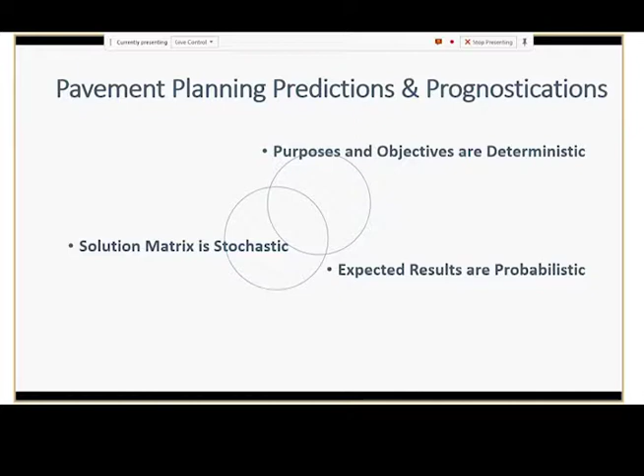In analyzing the performance characteristics, the expected life, and other performance variables, there are tools that are more reliable than others. The chosen tool we are using right now in MnDOT, particularly in developing the Pavement Investment Manual, because this presentation is a microcosm of that large effort, is reliability analysis, where you have a coalescence of these three contrarieties: the deterministic, the stochastic, and the probabilistic.

Now, in a reliability approach, you can look at the hazard of a particular fix versus time, and then think of the reliability as a mirror image of that. There is a hazard function, and there is a reliability function. Those are the kind of things we are using, such that if you analyzed our data in Australia, you should still get about the same result using the same method. So we are restricting the method in order to encompass the deterministic, the probabilistic, and the stochastic.

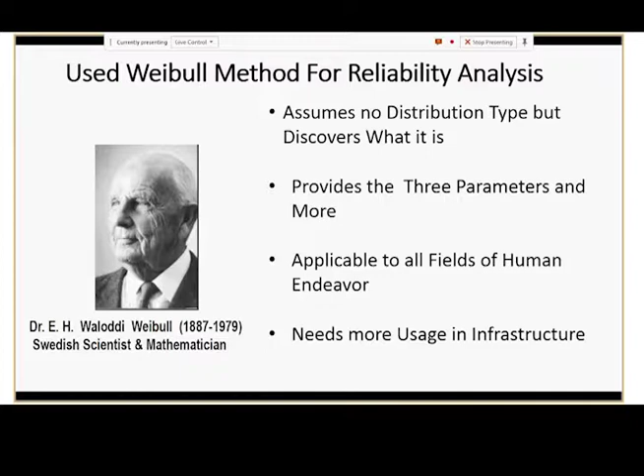But the Weibull method is applicable in the sense that it doesn't assume a distribution. In some cases, you will say it's normally distributed and use a certain analysis. But the Weibull method doesn't make an assumption of your distribution. It solves the problem and ultimately tells you what distribution it belongs to, and later I will show the various possible distributions. The Weibull gives us the scale parameter, the location parameter, and the shape parameter. The location parameter is the point at which you begin to see distresses, called the threshold time to failure.

Now, the shape parameter is a very vital part of what we do because it tells us what kind of failure mode you have. Do you have the infantile failure mode? Do you have the uniform mode of failure, which is the random mode of failure? In reliability analysis, the random mode of failure is the uniform rate of failure. Or do you have the end of life? When we design, we hope that most of our systems will have an end of life type failure.

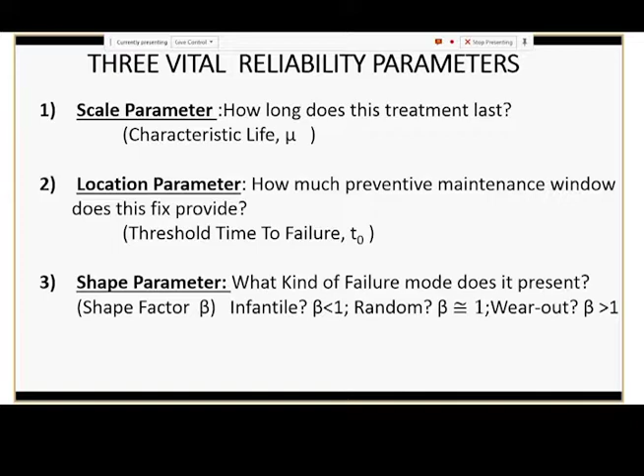So the Weibull analysis solves the problem and gives us these indices. And that's where it's very powerful. I've already defined it, but I just wanted to mention one simple thing about the Weibull distribution: it uses the cumulative distribution function. It doesn't use the probability density function.

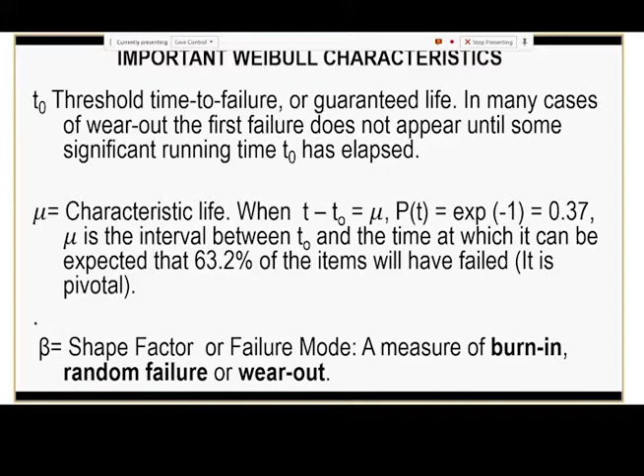In which case, the 63.2 percentile value is indicative of characteristic life, and the arithmetic is right there. I don't need to go into that. And the shape factor, like I said, is also what tells you whether you have burn-in, which is early failure. Some electronic systems are known to fail early, and then the rate of failure decreases with time because the systems fail early. Then you have the burn-in, and at the other end of it, you have the wear-out failure, which is the end of life failure.

Now, if you look at the area under that increase, somebody asked a valid question yesterday. How do we use this life extension or these life values to actually quantify benefits? So I said, well, that's a very valid question. Because most of the time, don't we talk about the area under the curve? Yes, we talk about the area under the curve as the benefit. But until you monetize that benefit, until you bring it to dollar value, or normalize it according to dollars, it doesn't really compare well with another fix.

So the idea of concrete rehab is to do that thing, to introduce that benefit area. And when it introduces that benefit area, then we want to step back and ask ourselves, at what cost are we introducing a particular benefit? And that's where the rubber hits the road.

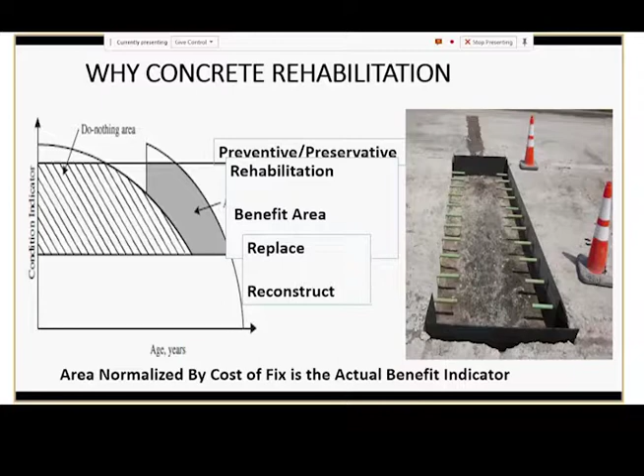And again, the various tools with which we get things done, that reminds me of a story. I don't know if I have time to tell any stories now, but there was somebody who had the regular chant of all in a day's work, a day's wage for a day's work, and he went from door to door. Anything for me to do for you? So he came to this lady's house, and the lady said, well, take a bucket of paint and this brush, go outside and paint the porch. So this gentleman came back after some hours and said, oh lady, I enjoyed doing the painting. So the lady says, all done? He said, yes, it's all done. By the way, lady, what you have out there is not a Porsche. It's a Mercedes, and I painted every inch of it.

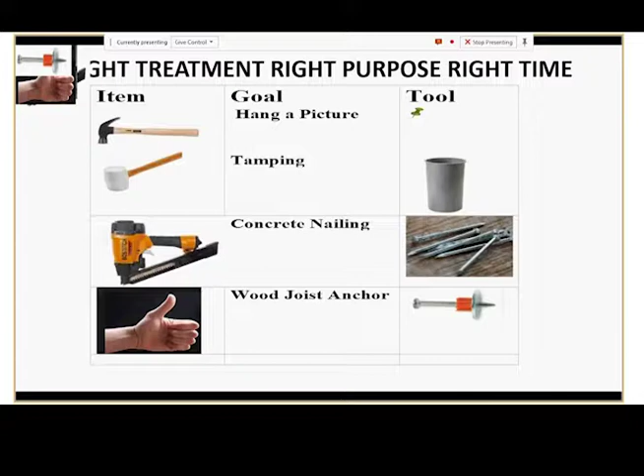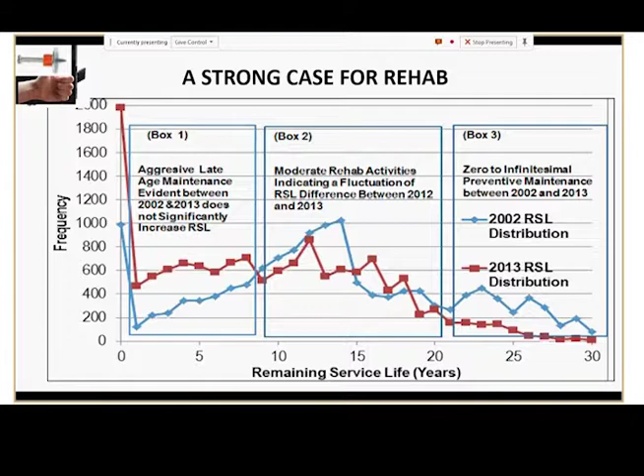So that zone is the sensitive zone where you have that crisscrossing, where a little investment, rightly done, not painting a Mercedes-Benz, can change the overall landscape of the remaining service life. And that's the reason why we do concrete rehab.

Dr. Debaroti Ghosh is not here.

While working on this pavement investment manual, we saw the need to create a software, and we did create a software that generated performance curves for about 535,000 rows of data representing the network performance, RQI, SR. SR is surface rating in any case. It's a combination of cracking, rutting, and everything. But for concrete, of course, it's faulting and cracking.

And then the ride quality index, that's a quasi definition. It's really not an index as such. It's still a rating, but it's how the riders felt when they rode on a scale of 0 to 5, 5 being the best. So what we did, we went into the network and wrote this program that generated performance curves so that we can see from the D records. We also have it for the M records. By the way, the D records are the design records where all the performances, all the fixes and everything are arranged according to design. For instance, you have unbonded overlay.

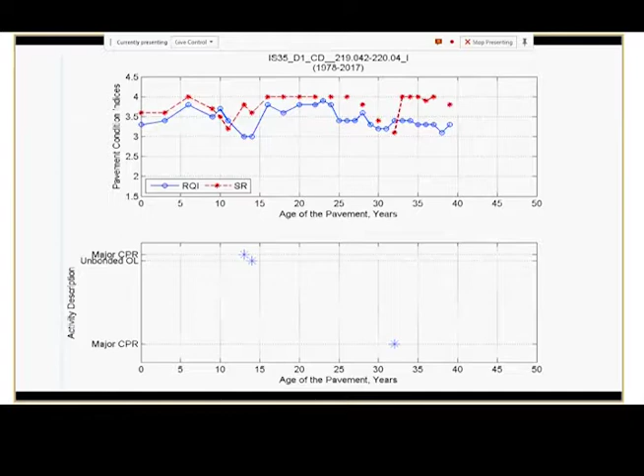Or, for instance, a thin overlay. You would see that in the network as a design. Then we also have the M records. So from the M record, you can call any section based on its M record or on its D record. And the M records are the mile records. Okay. So we now looked at the M records and decided that we will automatically generate the performance curves. So we generated, I believe it was about 15,000 performance curves based on the M records. For the D records, I believe it's slightly less. So we have 15,000 performance curves.

What do we do? How do we crunch through them? The things that are important to us are the age at which the fix is done. We call that time to rehab, TTR. Then the spike on account of the rehab. Okay, there's a spike for SR, there's a spike for RQI. And then what about the CAR, which is the condition at rehab? So we're interested in that. And also, we want the remaining service life. Now, our definition of remaining service life is the number of years it will take for the performance to reach 2.5 RQI.

So back to the Weibull method, your normal distribution assumes a normal distribution. Your Weibull distribution does not, but it allows you to do your calculation and later tells you your data is normally distributed, it's log normally distributed, it follows an exponential function and so on. So what we do with the Weibull distribution is that we get a particular fix and its performance over time. And then we do either a ranking or a CDF, a cumulative distribution function. So we run it through this equation that looks very complex, but it's not complex. What you do is take log twice, and then you linearize it. And once you linearize it, the parameters are right there from the lines that come out.

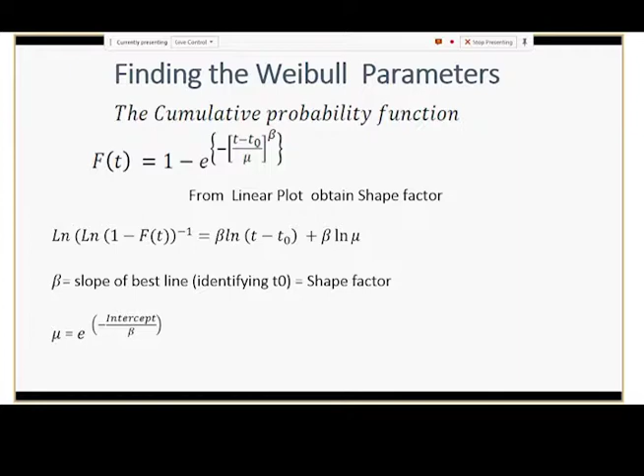And then you are able to get your beta, which is your gradient of the new straight line that you have generated, and your beta is your shape function. And then your mu is the scale function, which is the expected service life. And then later there are tools for getting the location parameter. And so having established both the reason data for concrete rehab, as well as the various nitty-gritties of the Weibull method, I'm going to run through the remaining slides.

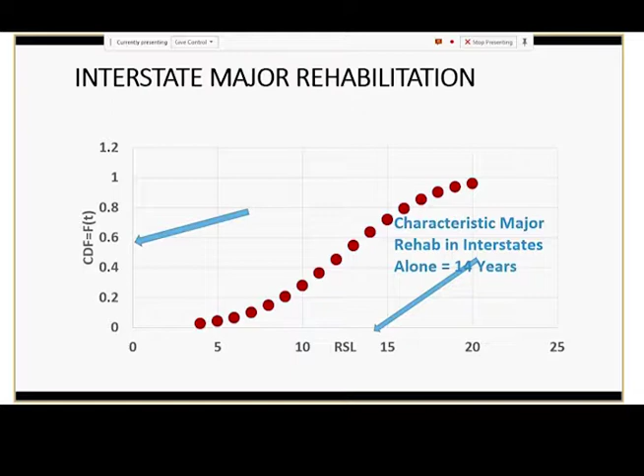So I did look at the interstates. The interstates are subject to very heavy traffic at tremendously high speeds. And what I found out, for major rehab without grinding, I found a characteristic life of 14 years. What I also observed was that there was no window for preventive maintenance, which is the location parameter. In other words, the T0 was 0. So there was no window for preventive maintenance. As we go along, we will see others.

Now, for major CPR with grind in the overall network, what I found was that the characteristic life was 18 years. And the failure mode was 2.9. That's the beta factor. Now, this is the interpretation of beta. If it's less than 1, it means that you have an infantile failure. If it's about 1, then you have a random failure, which is the uniform rate of failure.

The farther it is away from 1, then the more end of life it belongs to. Now, if it's between 1 and 2, then that looks like a log normal distribution, and that's usually governed by things like cracking that are not necessarily failure related, but they introduce some other form of distress modes. And the location parameter there was about 2 years.

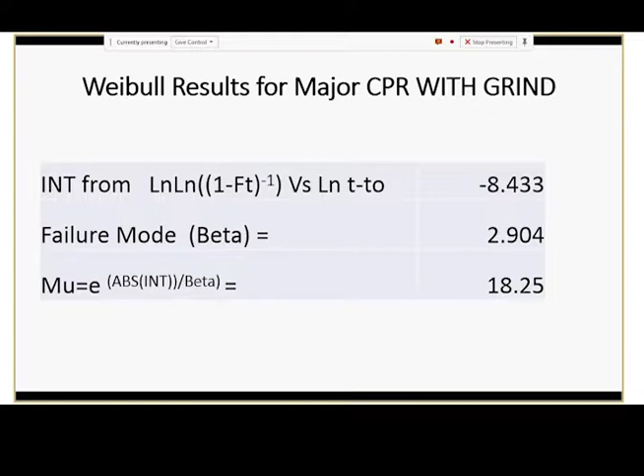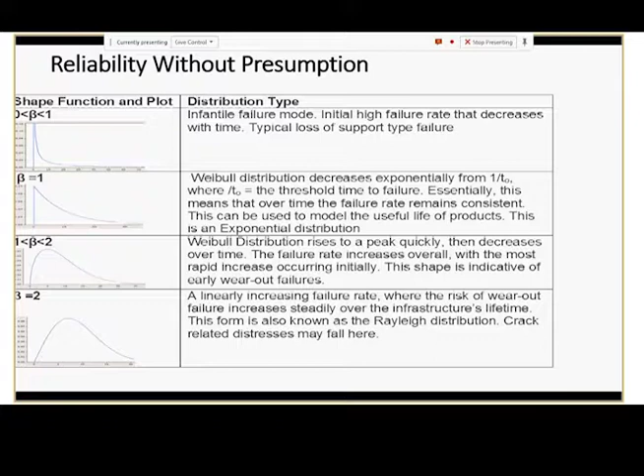But think about it. If you have 2 years as your preventive maintenance window, how much mobilization can you really do within 2 years? So it leaves you technically with not much of a window. So here, I don't need to go through all this. These actually show us the various shape functions that show the kind of distribution that you have. And they are very important when we go into the real technicalities of evaluating the performance of our systems.

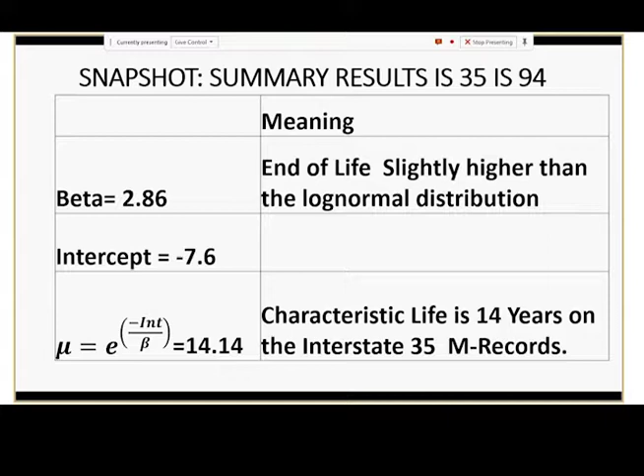Okay. Another thing I looked at was the interstate. I did talk about the interstate already. All right, so let's go for that. Here is the hazard function. The real definition of hazard function is the probability density function divided by the reliability, which is 1 minus F(x). Okay, so this is the hazard function. Sorry, which is 1 minus F(x), our F(x) is the cumulative distribution function. So this is from our definition of the hazard function.

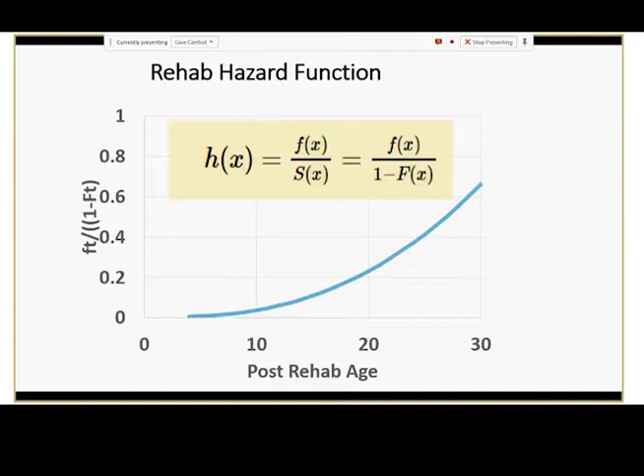We can see that as the years increase, we're having something that looks like an exponential form of hazard function. The normal hazard function would be something that's more like a uniform rate. It's not affected by time as such, uniform rate of failure. And then if it was a mirror image of this, then it will definitely be an infantile type failure.

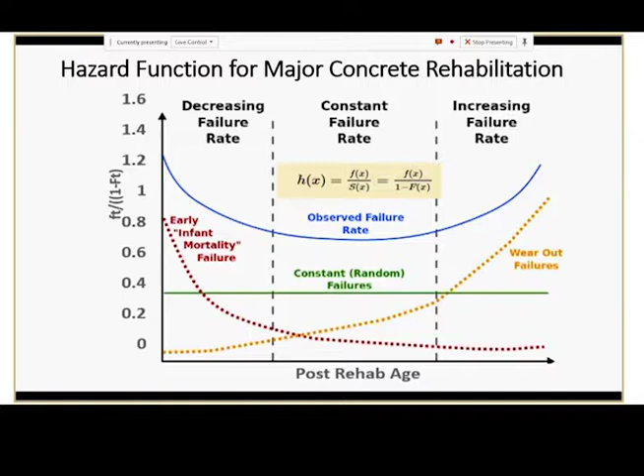And one mode of description of reliability analysis is the bathtub phenomenon. If you see the left-hand side, that's infantile type failure, and then the center is like the center of the bathtub, and the right-hand side is the other end of the bathtub. So we use the bathtub mode. So what part of the bathtub is it? And that's another way of characterizing.

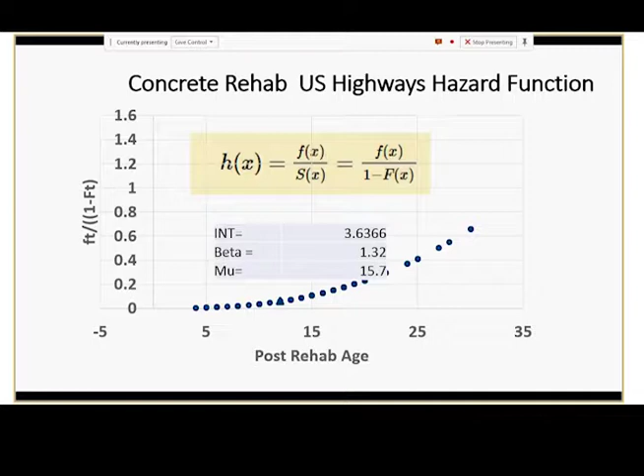Another thing I looked at, because I looked at other fixes, I hope it's not an anathema if I mention things like unbonded overlay. Actually, we are doing the same thing for every fix in the network, including all the bituminous fixes, all the chip seals and everything. In most of them, there is no real rhyme and reason to the time to rehab and the remaining service life. But somehow, with the concrete rehabs, I'm seeing some rhyme and reason, either because decisions are solely based on the performance alone and not by political factors, or maybe we are doing something right somewhere. But something like this is pretty interesting.

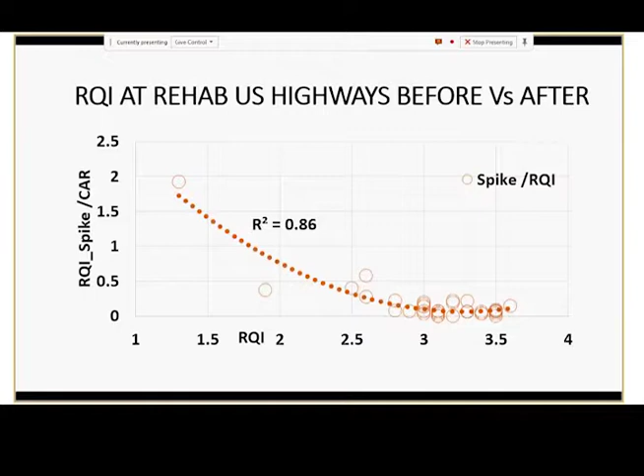It shows that the spike in the RQI is a function of the RQI at the time of fixing. That's very rare to find in infrastructure systems. But we will dig more into it, run the same thing for other things like unbonded overlay. However, the function of remaining service life versus time to rehab, not a very wonderful function, but there's a slight decrease, which shows you that at the point you are doing certain types of fixes, the concrete might not really be ready or available or strong enough.

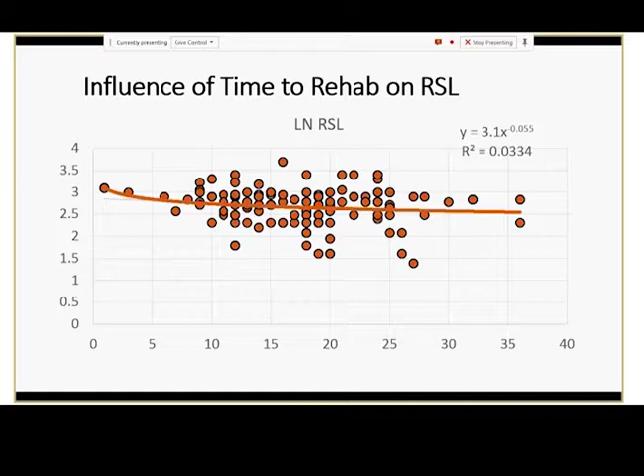It might be at a point where if you do a diamond grinding, you might be introducing some more micro cracks into the system. And you need that diamond grinding to really finish up your concrete rehab. So, this is a mathematical method which I won't say I developed from scratch, but I kind of worked on it and made it available. And I'm able to use that to test other methods of normalizing to find the location parameter.

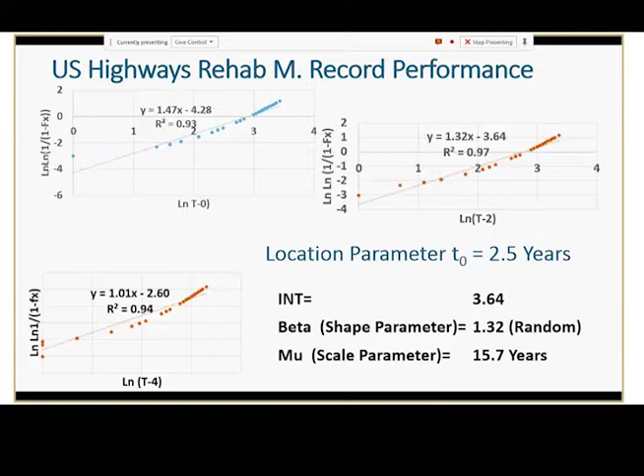So I did run this, and I found this US highways record performance very interesting. Because when I ran it, I found that what normally should be the T0, which in most cases ends the analysis, wasn't the best straight line. It's the best straight line that gives you the T0, the location parameter. So we saw that it was between 4 and 2, and finally we found it at about 2.5 years. I used that other method, and I found it to be 3 years. So essentially, we are approaching this thing from a reliability perspective.

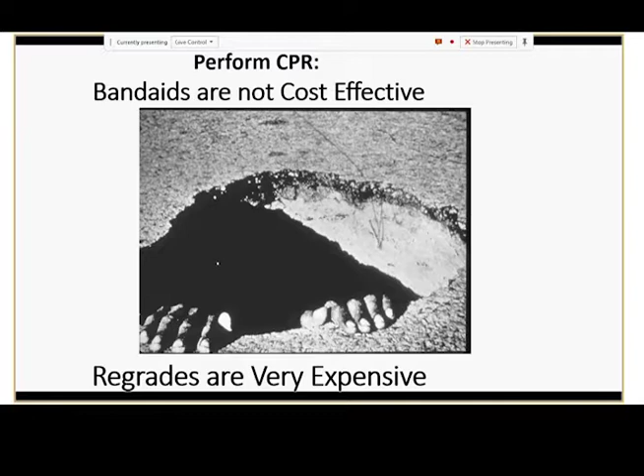And one thing I would like to say at this point in time is that band-aids are not cost-effective. We should do rehab because regrades are extremely expensive. We don't want to get into that kind of situation that you have in that picture.

So with that, I'd like to acknowledge Glenn Armstrong, Jeff Bronner, Kurt Turgeon, Dave Janish, Debaroti Ghosh, Brandon, MnDOT materials engineers who have been helping with information and data that have enabled us to do this reliability analysis so far. Like I said, this is a microcosm of the Pavement Investment Manual, which we are trying to make available within a short time. With that, I thank you.

Sometimes, like when you use the database, you need to separate a set of data to validate. Is there any kind of validation that you run on it? Well, what we typically do is like a Bayesian approach. It's like a perturbation approach. We do that kind of analysis on the network. We go to MnROAD, where you have a structured experiment, and see what we have. Yeah, that's what I was. Yeah, we do that.